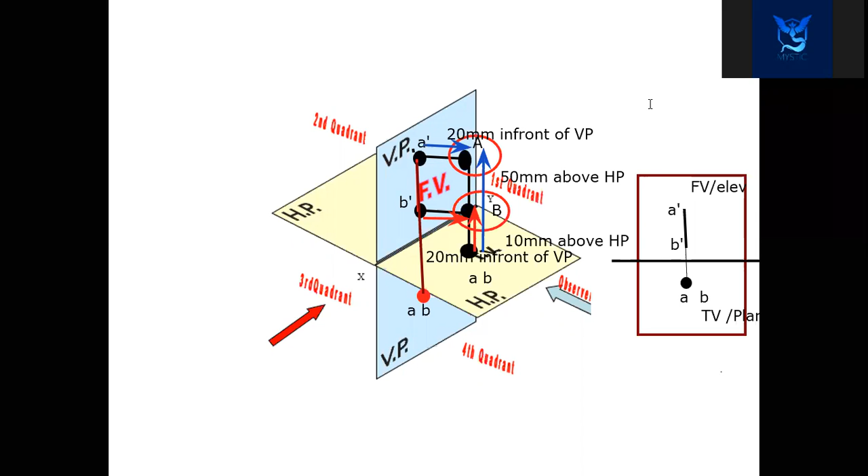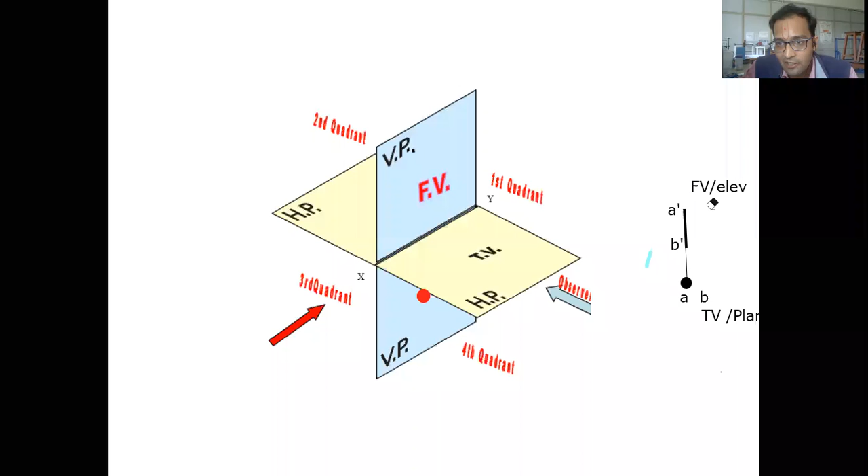Let us go for one more complexity in our observation. Now it will become complex. This was the simple stuff that you should understand. Now I'll be moving ahead to formats which are somewhat difficult to understand. Look, what if point A is positioned over here? I'll be noting all details in this one, so wait for the detailed presentation.

I'll be having 2 points. The point one is, let me drop those details and use the arrow so that you can have a clear idea in your mind. This one is for point one. Now let me use another color for the second presentation, and this one is for point two. Okay, now let me note those points. This point is A and this point is B. So which line are we expressing right now? Line AB.

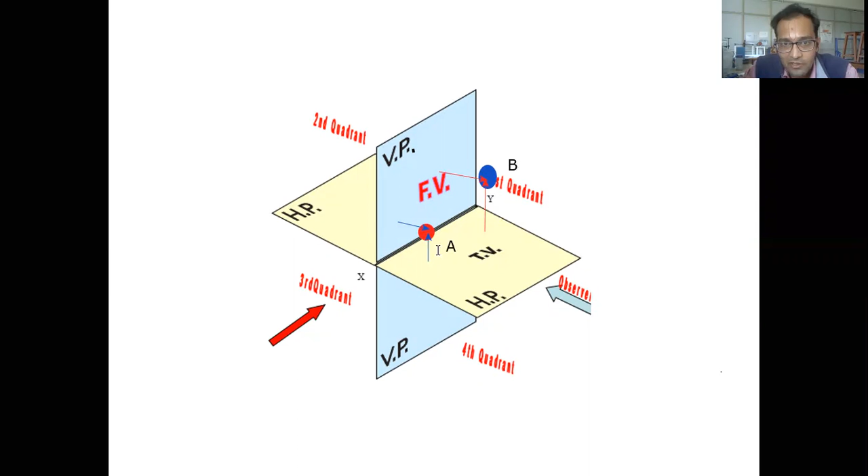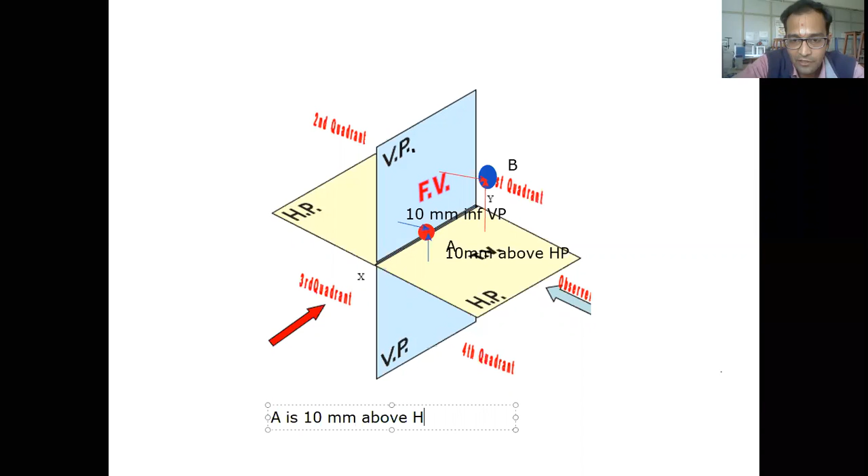But the data we have represented is going to be different from the previous ones. Here I am going to say point A is 10 mm above HP and 10 mm in front of VP. This is for point A. Let me mention it over here also. Point A is 10 mm above HP and 10 mm in front of VP. This is the data for point A.

Now let me mention the data for point B. Point B is 30 mm above HP and 10 mm in front of VP.

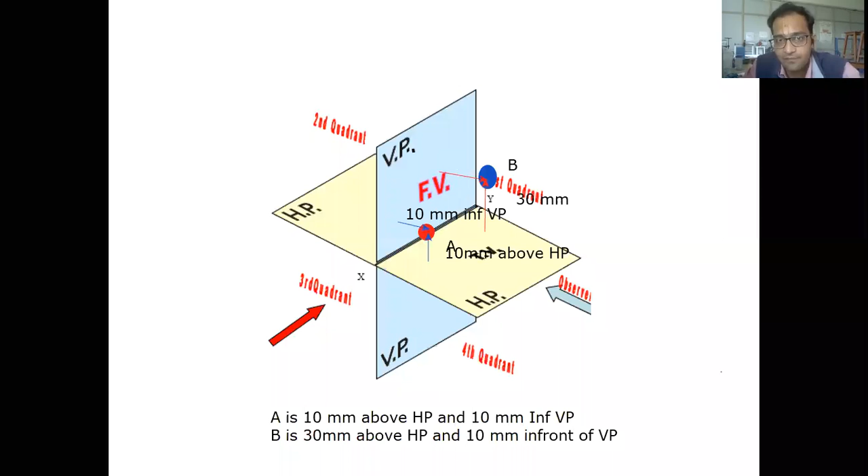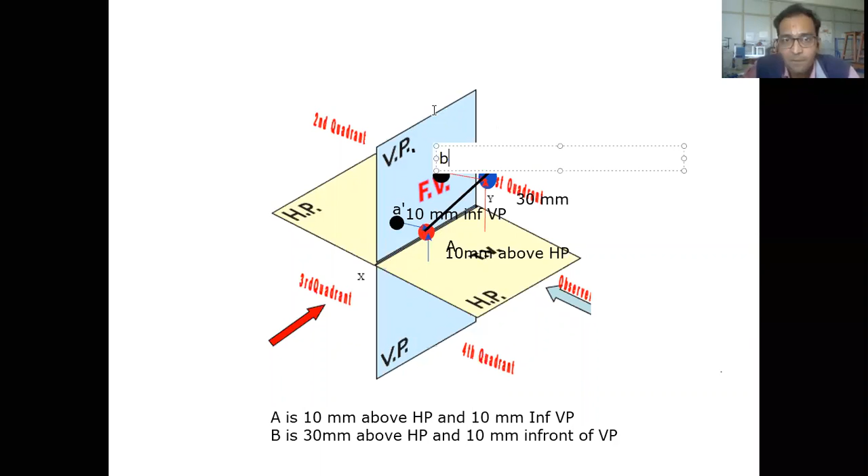So what is going to happen now? Let us see. Let me project that line so that we have a clear understanding. This is the line we want to represent. Here we are going to have its projection. So this is going to be the point A dash, and here we have point B's elevation, so this is going to be B dash, and when I join it, it is presented like this.

Now let me ask you a question. Whether capital AB, line AB, is going to have the same length as A dash B dash, or different? Will the lengths of AB and A dash B dash be equal or different? What can you say? Equal. Why is it equal? If you can express. Because of projection. A dash B dash is the image of AB, sir.

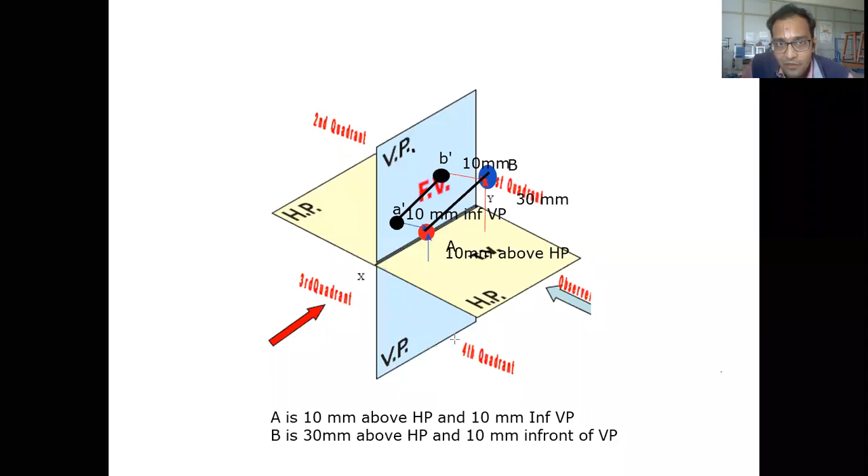Okay, let me give you details so that you can use data to identify this. If you can unmute yourself because we are getting disturbance. I think your microphone is giving some disturbance. That's okay. Now let me express that one. So what will happen here? Look over here. 10 mm in front of VP. Point A is also 10 mm in front of VP. Point B is also 10 mm in front of VP. So you can say these points, when joined, are going to be parallel to the vertical plane.

तो अब, yes sir. जो लाइन AC बन रही है, that is not going to be parallel to either HP or VP. HP, VP दोनों में से एक से भी वो parallel नहीं है. अब उसका कंडीशन कैसा है? वो HP से भी कोई एंगल कंस्ट्रक्ट कर रहा है और VP से भी कोई एंगल कंस्ट्रक्ट कर रहा है. जबकि जब AB को ऑब्जर्व करते हैं तो वहां पे कंडीशन कैसा है?

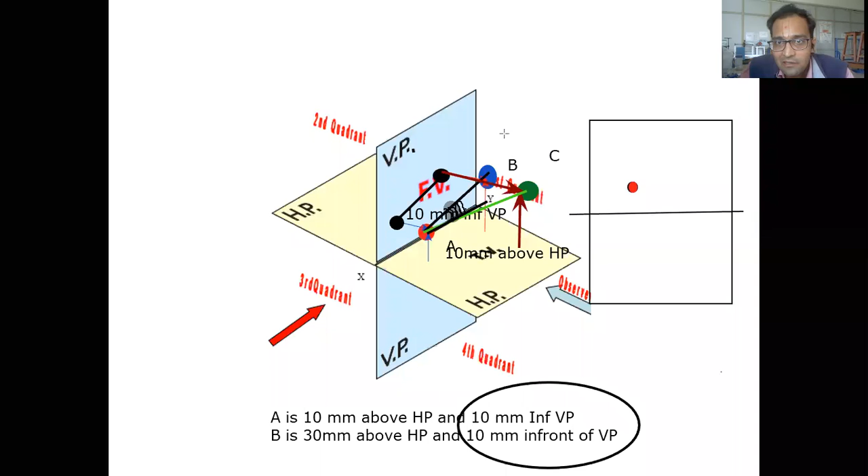Okay, let me express it separately so that while drafting the projections you are going to be able to identify the differences. Let me drop the two-dimensional figure of it. तो ये रहेगा हमारा plane, ये रहेगा हमारा reference, and when I want to drop a point A, then where it is going to be situated? It is going to be over here somewhere. When I want to drop a point B, then where it is going to be situated? Let me use the same color for this one. Okay, let me use the colors which I have plotted over here so that you can have identification in your mind. This is going to be point A. This is going to be point B. Okay. So what is going to happen? When I see AB over here, this is going to be its projection.

Okay. When I drop its projection in top view, तो top view में उसका projection कैसे मिलने वाला है? Let me use black color for that one. This is going to be the position of A and this is going to be the position of point B. They are going to be on a single line. Okay, this is for AB. Let me note that one also so that you can understand A and B. And the presentation what I have drafted in vertical plane is a dash and b dash. And when I see the same in top view, let me use the same colors what I have up over here, red and blue for AB. So I'm going to have a over here and b over here. Okay, so ये रहा projection.

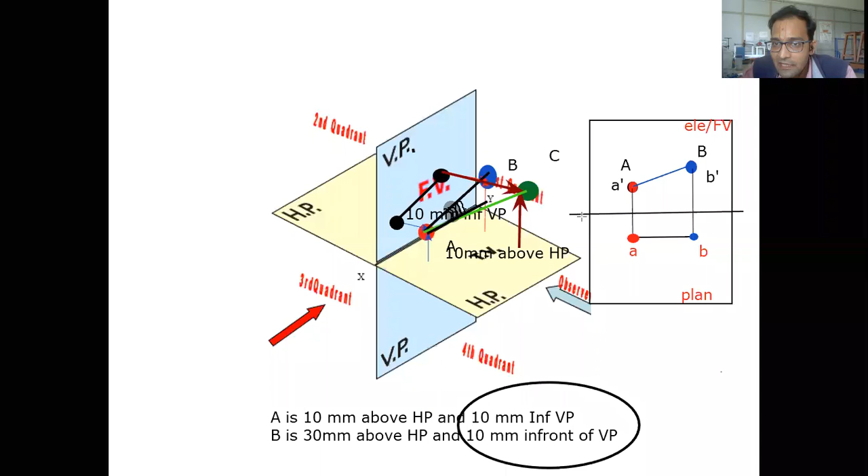Whenever your line is parallel to vertical plane, it is going to be parallel to reference in plan. Let me note this also. This is going to be called plan. This is going to be called elevation or front view. Okay. Now let us discuss about C, where you are going to find point C. Point C is in green color. So I'll be just dropping it over here. Whenever you will see the position of C, it is going to be over here somewhere at the same position where you have found b dash. So here you are going to have c dash.

And in top view, as we are aware that now it is not parallel to vertical plane, so this line is going to be plotted like this. Let me use black color for that. This is going to be C. Okay, and we are using green color for that, so let me use that one. This is going to be C. Okay, जो blue में था वो B था, green में दिख रहा है, that is C, point C. And we are indicating plan over here, so I just have to plot it as small c, c dash and c. Is it going to be on the same line? Yes, it is going to be on the same vertical reference. उसी vertical reference पे ये रहने वाला है. Is it clear? आ रहा है समझ में?

Yes, sir. It is somewhat difficult to understand, but if you just go through the memories of projection transfer, what we have discussed in this session, you are going to identify this one. Okay? अब इसे आइडेंटिफाई कैसे करेंगे? आप ये डिटेल कैसे समझना है, वो अगर आपका कंसिडरेशन है तो आप ऑब्जर्व करिए.

What I have told for point A: it is 10 mm above HP, 10 mm in front of VP. Now let me show you the notation so that you can clearly have the configuration in your mind. So when I say it is 10 mm above HP, it is going to be presented over here. When I say it is 10 mm in front of VP, it is going to be presented over here. Is it so?

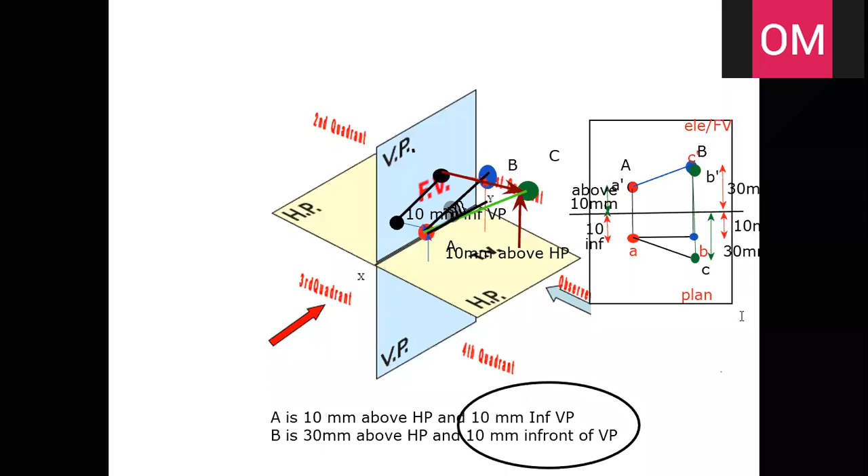Yes, sir. Okay, you can capture the screen. Have you taken the screenshot? Yes, sir. Okay, good. Let us move ahead for another difficulty. Now I hope you are clear. When I say point is above HP in front of VP, the configuration is going to look like this.

If anybody wants to ask any question, they can ask. Okay, I think everybody is clear now. If you are clear, just place yes in the chat box. If not clear, write no in the chat box. Okay, I have got multiple yes over here. Whoever is not clear, just drop NC or not clear, so that I can concentrate on the doubt of yours.

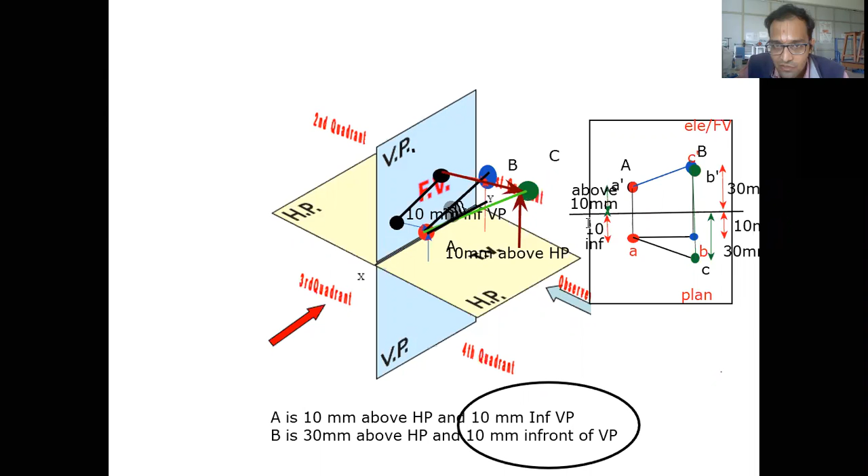Yes, sir. Okay. So where did you find the exact query that you are not able to understand? About C, about elevation. C's elevation. Is it so? Hmm. That is C dash, indication of C dash. Oh, yes, sir. Okay. So let me go for that particular doubt only.

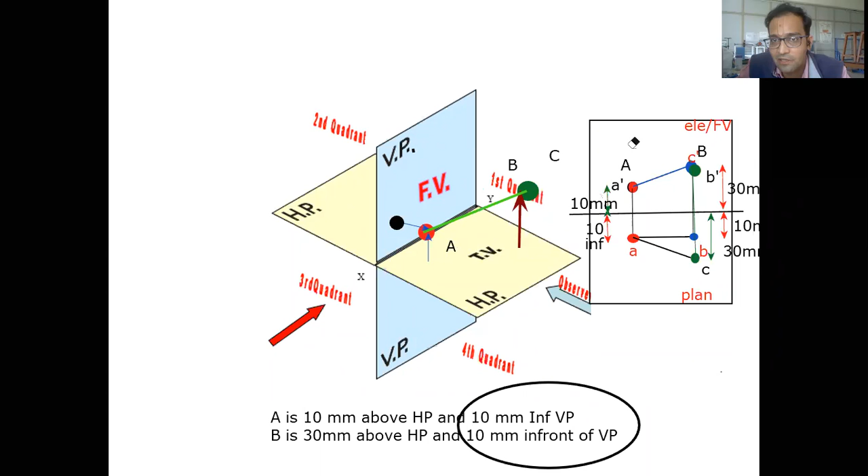Okay. I hope you are able to see the things now. Let me clear this one so that we can have a clear idea about that. Okay, these things are clear now. So are you able to understand about A? Yes, sir. Okay, you can keep yourself unmuted. Whenever I ask a question, if you are comfortable, just answer those questions so that we can exactly find where your doubt is left. Okay, so let us move ahead. Point A is there.

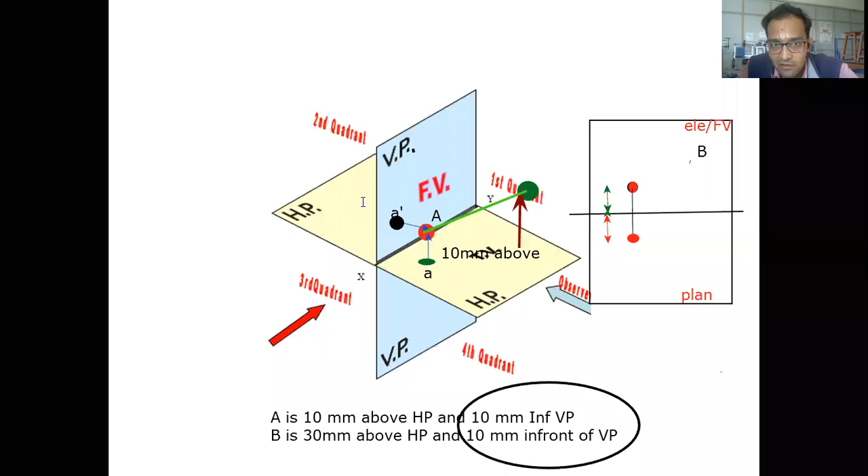We are saying that it is 10 mm above HP and 10 mm in front of VP. I hope you are able to understand that one. Yes. Okay, let us move ahead. I'm dropping a point C over here, and for C I am saying that it is 30 mm above HP and 30 mm in front of VP. Okay, let me drop that one so that we can be more clear about that. So this is the projection, and we are having point C's elevation over here in terms of C dash. Okay, so point C is 30 mm above HP, 30 mm in front of VP.

Okay, now let me ask you a question. When I drop C's projection on the vertical plane, then where would I find C dash?

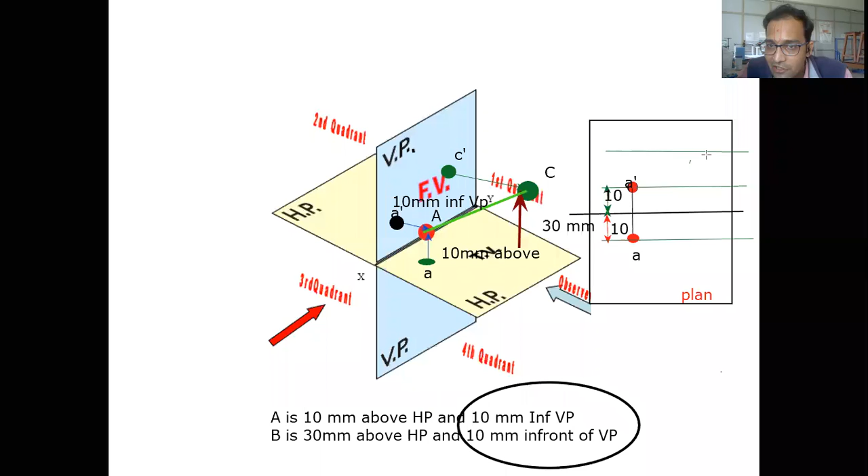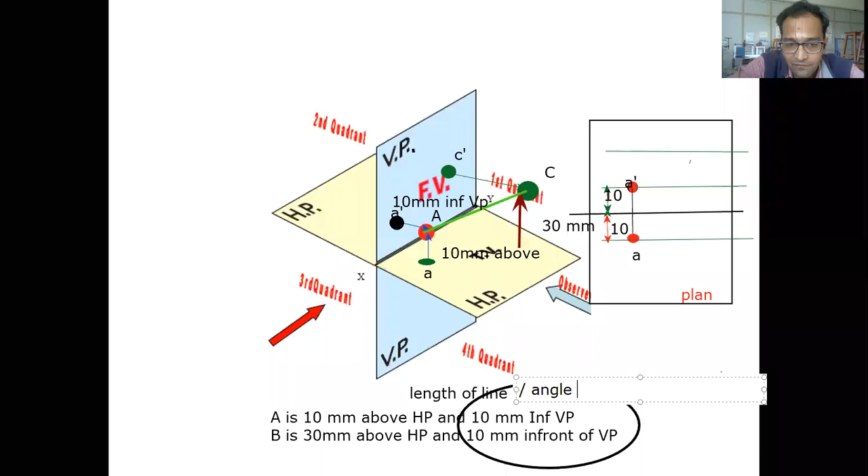और angle of inclination of line. But here we are already clear that it is 30 mm above, 30 mm in front. तो 30 mm above, 30 mm in front, उसका हमें specific position already available है. So I'm just dropping that position over here. This is going to be my C point position. Let me take this one. It is going to be C1 dash. ये position already हमारे पास है. कौन सा वाला? 30 mm वाला.

तो अभी जो हमें प्रोजेक्शन मिल रहा है वो प्रोजेक्शन कौन सा रहने वाला है? It is available on the 30 mm line which is referring to the position 30 mm above HP, 30 mm in front of VP. तो ये condition हमें समझ में आ गया. आ गया ना? तो that is going to be the inclination formation. This is going to be A dash C dash, और वैसे ही 30 mm नीचे एक और लाइन.

ये जो डेटा है इसे express करने के लिए मुझे एक और लेक्चर चाहिए. ये जो फॉर्मेट है लाइंस वाला फॉर्मेट, as I have already told you कि A है, there are infinite possibilities for same position. हमने आगे discuss किया. पॉइंट A, जैसे मैं बोलता हूँ कि point A is 10 mm above HP, 10 mm in front of VP, तो A के infinite possibilities है position की. तो हम लोग क्या करते हैं? We are drafting a line over here which is indicating infinite possibilities of positioning of point A.

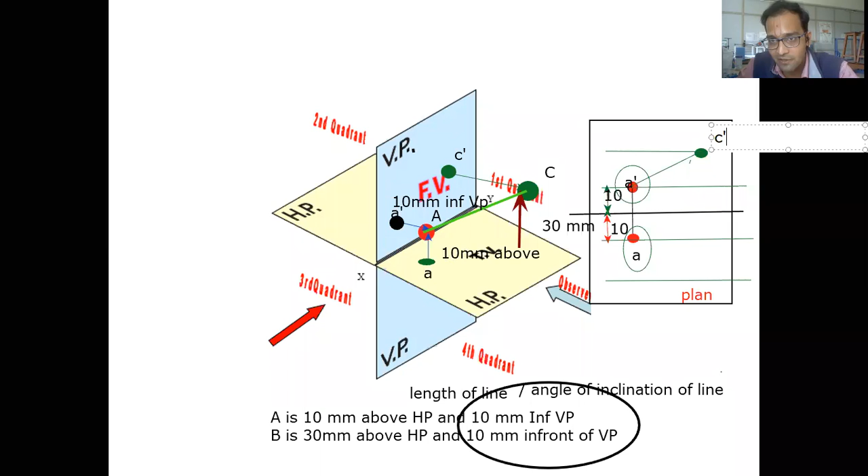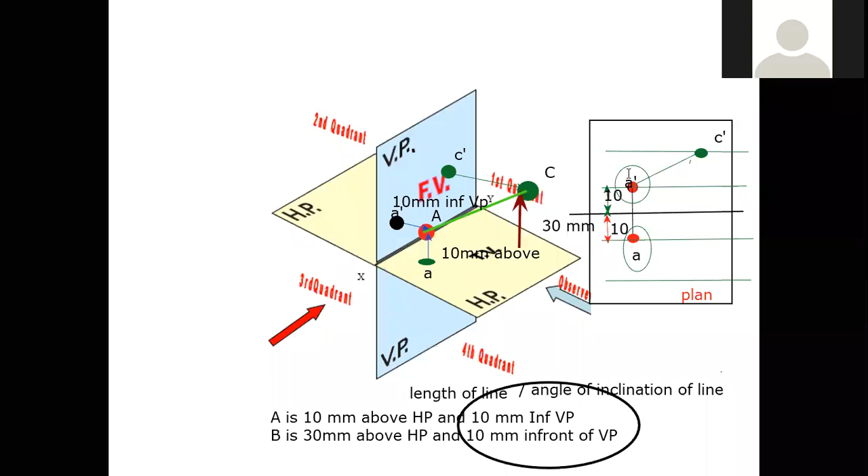अब नेक्स्ट वाला जो सेशन होने वाला है हमारा, उस सेशन में मैं ये एक्चुअली आपको ड्राफ्ट करके दिखाऊंगा ऑन पेज, how exactly this is going to be presented. ओके, अब तक यहाँ पे किसी को डाउट है? No, sir. Okay, good. Let me ask one more question to all.

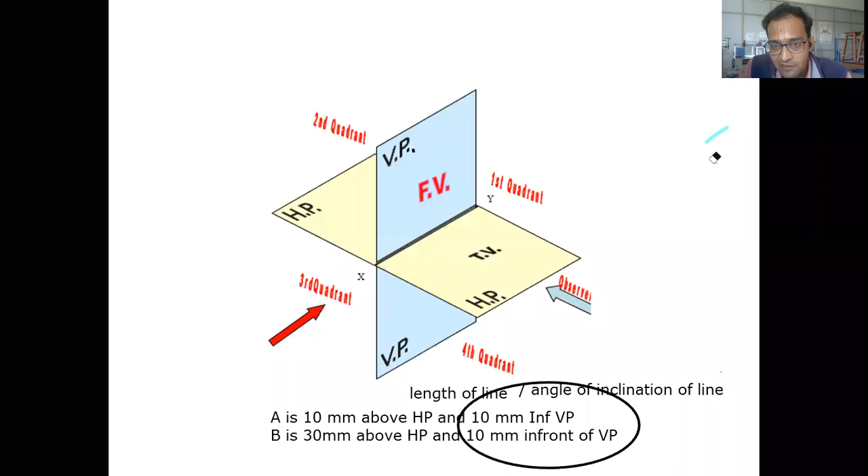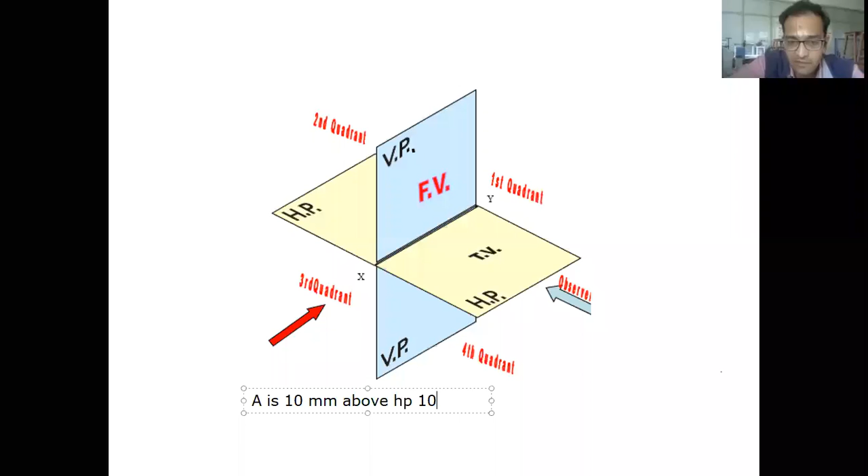ये common है सबके लिए. Whoever, after seeing it, I'm saying after seeing it, whoever is comfortable to answer, they can answer. Let me drop details over here. If you are able to understand those details or not, let me refer it. Point A is 10 mm above HP, 10 mm in front of VP. ये है point A का position.

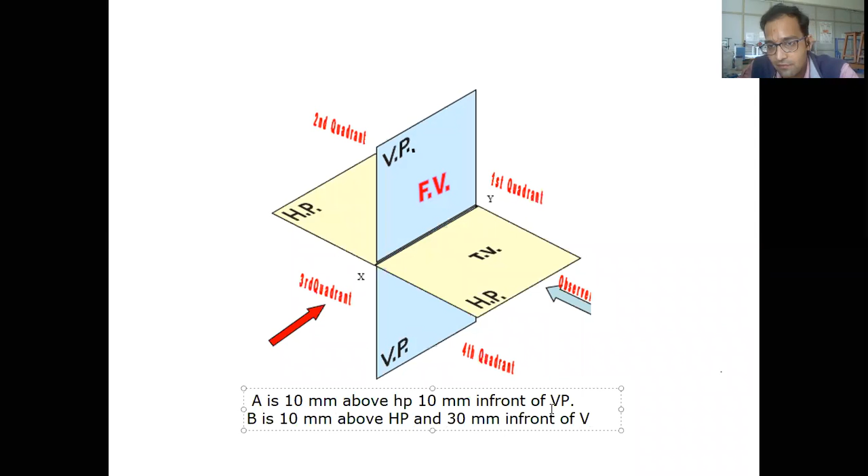Now let me take another position. Point B is 10 mm above HP and 30 mm in front of VP. Okay. ये डेटा कितनों को समझ में आया? Yes, sir. Okay, let me express that one.

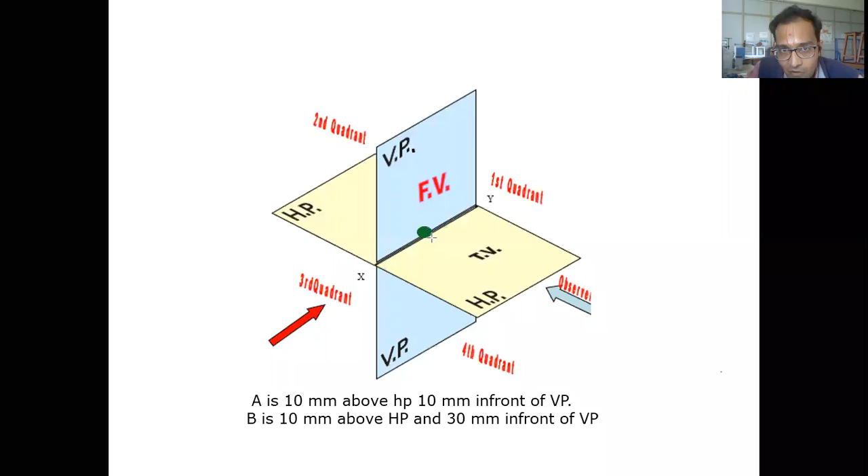Point A is over here. Point B is over here somewhere. ठीक है. Let me note those positions also. This one and this one are going to be same, and this one and this one are going to be different. So can you express something what you can understand from here? This line, let me ask you for certain possibilities. This line is parallel to HP, or parallel to VP, both, or inclined to both. कौन सा possibility आपको सही लगता है?

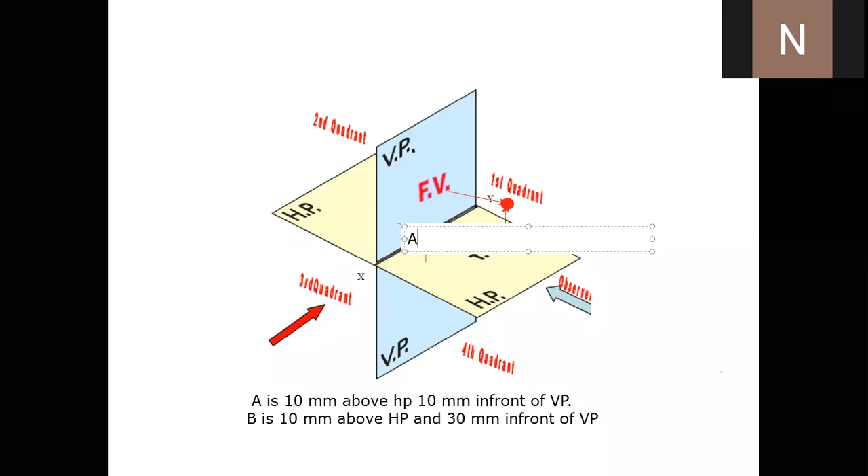Only parallel to HP. Someone had said that it is parallel to HP. Who said that? Me, sir. Okay. Anyone other? I heard 2 or 3 persons saying that it is parallel to HP. Okay, yes, you are definitely right. Okay, 100% you are right. It is parallel to horizontal plane.

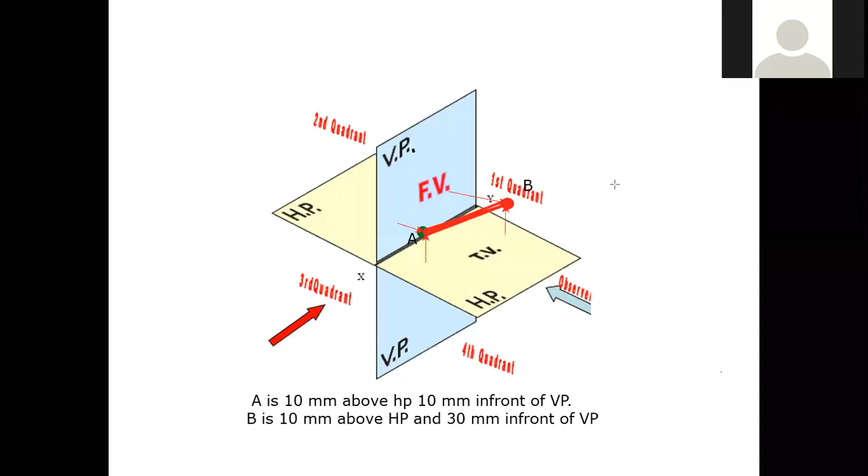How had you identified that it is parallel to horizontal plane? If you can express. जिसने भी आंसर दिया वो एक्सप्रेस करे. आपको कैसे लगा कि वो HP से पैरेलल होगा? हाँ, क्योंकि दोनों पॉइंट का जो HP से डिस्टेंस है वो सेम है. Good. Above HP, that distance is same in both. Good. I have written that it is 10 mm above HP. If both are 10 mm above HP, then it is going to be parallel to horizontal plane.

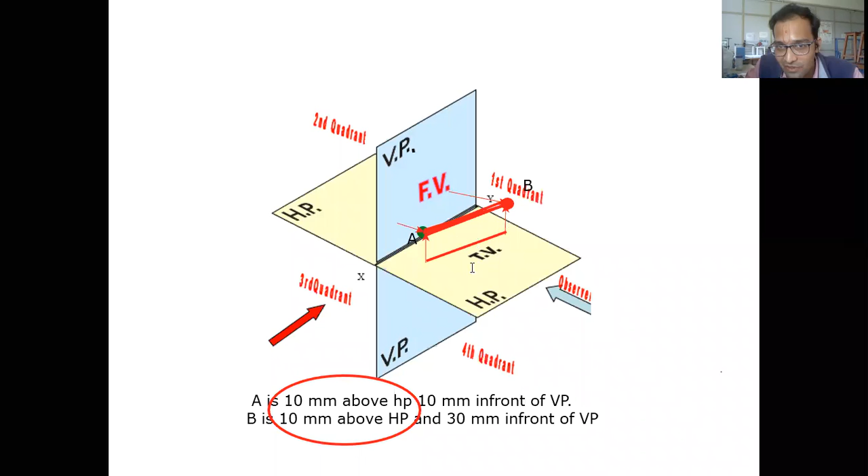And if it is parallel to horizontal plane, the true length of line is going to be available in the top view, in the plane which is parallel to that line. Okay, so this is going to be the true length. अब ये वर्ड भी आपको याद रखना होगा. If I say AB is there, then ab is going to have same length as AB. Now what is that small ab? It is plan of the line what we need to present.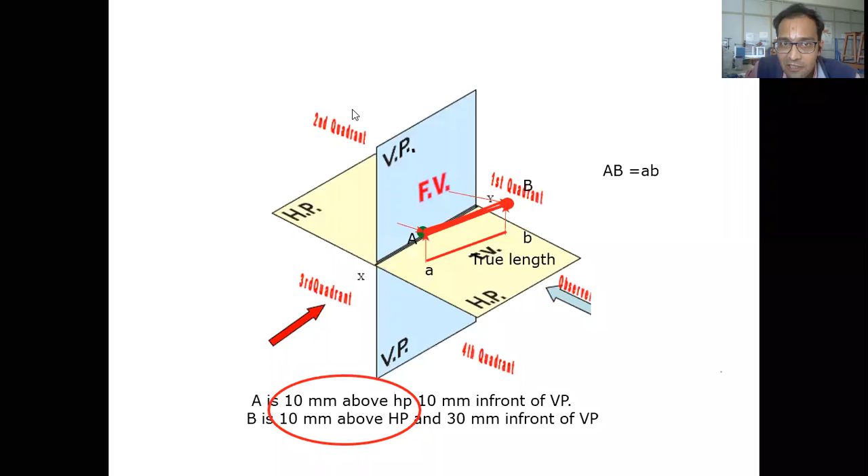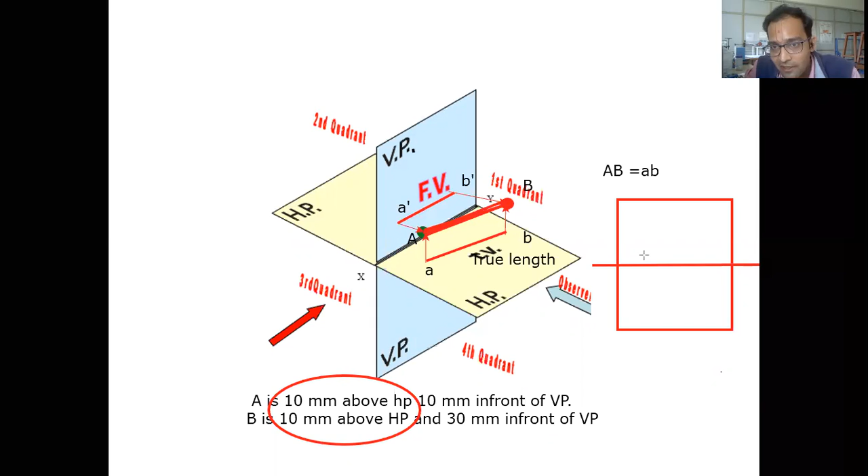Okay, but if I take projection of that one on vertical plane, then that projection is going to be smaller as compared to the line of length AB. ओके, तो इसका जो प्रोजेक्शन है वो हमें स्मॉल मिलने वाला है इसमें एलिवेशन में. अब ये भी आपको सीखना होगा कैसे स्मॉल है कैसे लार्ज है, ये भी मैं कवर करूंगा नेक्स्ट सेशन में. But how exactly it is expressed, let me show it to you. इसे हम एग्जैक्टली देखेंगे कैसे. So we are going to have the point A dash and A over here, and when we see its projection, then its projection is going to be somewhat aligned in the top view. Okay, so this is going to be the approach.

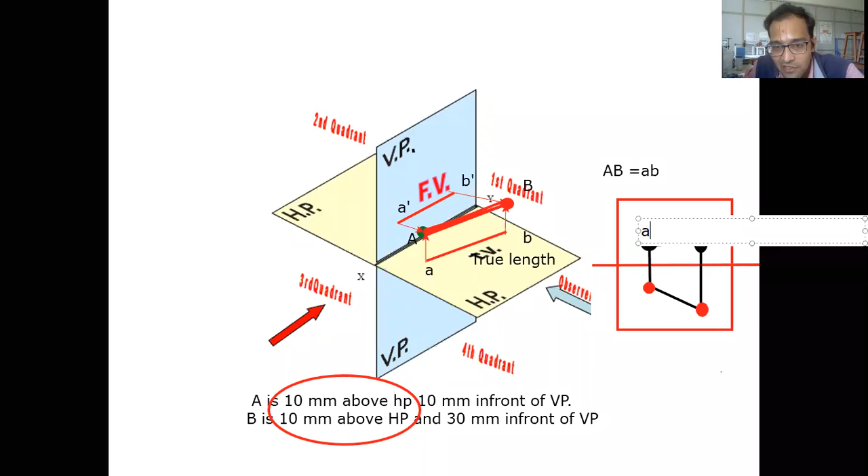This point is A dash, this point is B dash, this point is small a, this point is small b. Now let us consider the length of line A dash B dash and AB, which is going to be the longer one. A dash B dash का लेंथ ज्यादा रहेगा या AB का लेंथ ज्यादा रहेगा? AB का ज्यादा रहेगा. And what is that length? It is true length. किसका ट्रू लेंथ है? जो AB का था वही ट्रू लेंथ यहाँ पे प्लान में प्रेजेंट हो रहा है. So here plan is indicating the true length of the line, not the elevation. Is it clear? समझ में आ रहा है सबको?

Yes, sir. तो ये भी आप स्क्रीनशॉट कैप्चर करके रखिए, ये भी आपको समझ में आ जाएगा. आगे जाके इसे प्रैक्टिस करना है, विजुलाइज करना है और सोचना है क्या होता है. ये तो हम सारा डिस्कशन कर रहे थे फर्स्ट क्वाड्रेंट के लिए. ओके, नाउ व्हाट इफ इट शिफ्ट्स टू सेकंड क्वाड्रेंट, थर्ड क्वाड्रेंट, फोर्थ क्वाड्रेंट? That is going to be the next discussion session from our side. I hope you have understood.